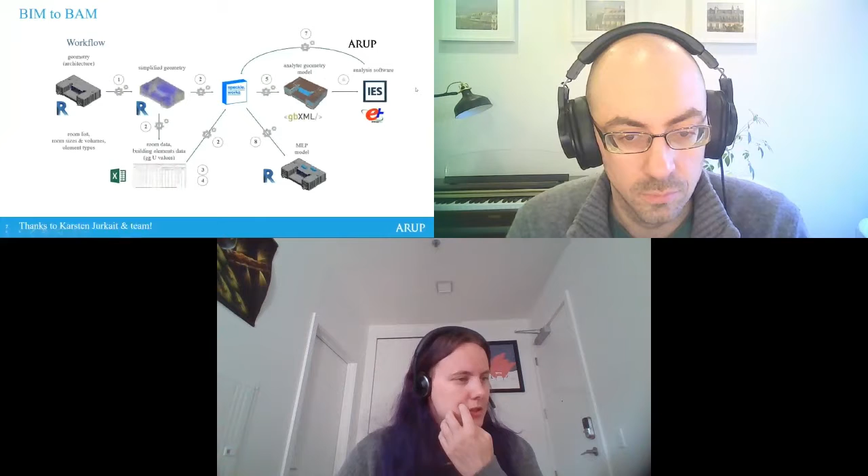Next slide. So one example of a more overarching tool that's been built within Arup using Speckle, dealing specifically with an energy modeling and loads modeling workflow, is our BIM to BAM tool. BIM to BAM is BIM to Building Analysis Model. This is a tool that lets us look at basic geometry and architecture within Revit, simplify it, and create spaces that we use for our load models.

And then we're able to use Speckle to merge those spaces with the design data, like occupancy, watts per square foot for lighting and equipment, or per square meter if you're not in the US, to very easily create a GBXML file with all of our initial loads assumptions per space type already filled out.

That can be passed back to Speckle and brought into any load modeling software we use within Arup. So instead of spending days figuring out how to simplify a model, going back and forth along that linear process, we can get a load model up and running in a matter of hours, which on large complex projects is a huge time saver and makes our workflows quite a lot easier.

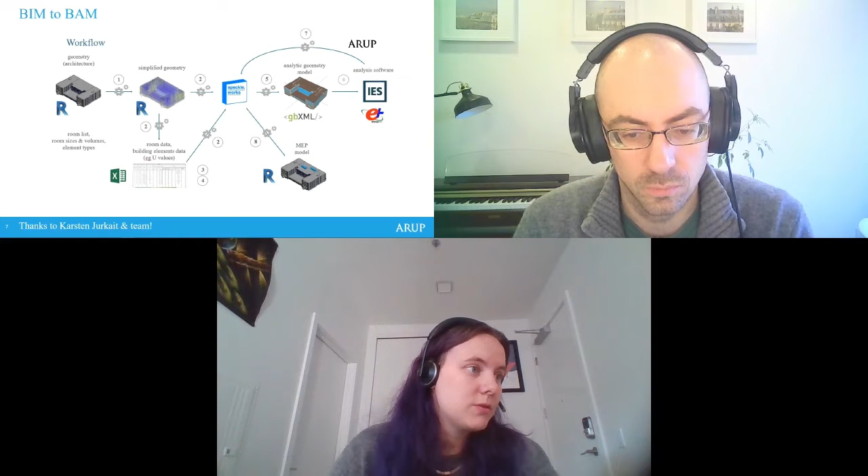Fantastic. Thanks, Lydia. And if any of you have questions about projects, we're going to go pretty fast through all of these, so please, we'll come back to them at the end, don't worry.

So this project is an example of a bunch of existing buildings that needed retrofit, and we were able to use Speckle because it was a really efficient way to have one person build the BIM model and the structural analysis model. Revit has a capability to build an analytical model, and with Speckle we were able to ship that directly into our analysis. Thibault here was basically able to save a huge amount of time.

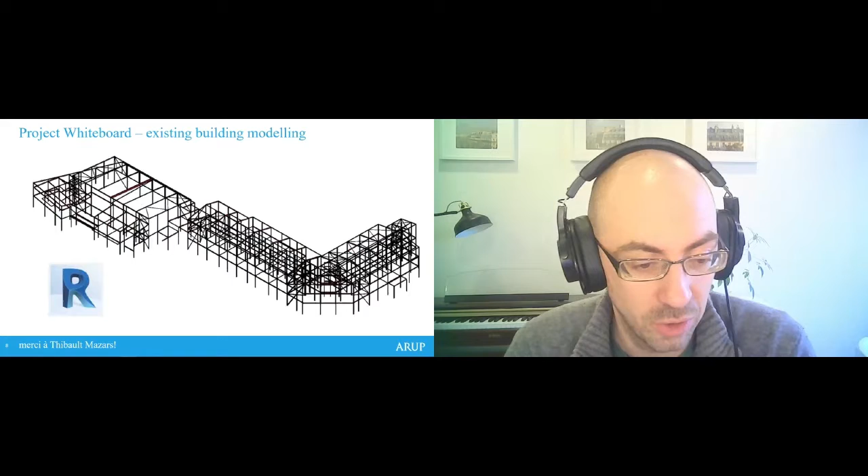And because this was a project that the team in Canada was working on, but the projects were in Europe, the fact that it was in Speckle also helped with coordination and communication across many time zones. This is a project in Wales, Dyfi Crossing, and again Speckle was used to ensure that the analysis model was in sync with the BIM model.

Moving right along, unfortunately I can't show you pictures of this project, but it's a big warehouse project, and we're building a number of these around the world for a single client. This is a really cool example of how you don't have to go whole hog on Speckle to get the benefits.

In this case, the team starts with setting out geometry in Rhino. They just lay out basic geometry of the warehouse in Rhino, and they have a Grasshopper script that builds up the structural analytical model from that. From there, they send it off to structural analysis. GSA is a structural analysis package via Geometry Gym.

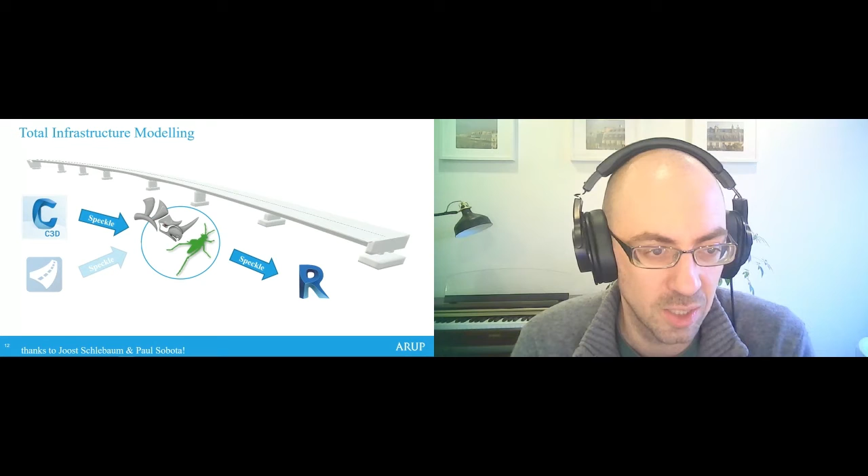Our infrastructure teams - I talked earlier about how processes and standards are important. So our infrastructure team in Europe has set up a process for using Speckle called total infrastructure modeling. And this is a bridge. This is not a demo bridge, this is an actual bridge that our teams are designing.

They're using Speckle to go from Civil 3D into Rhino. Speaking to Paul here, who gave me these images, he said, I've just started with Speckle 2, and it's really great. We've got a Civil 3D connector directly in there, and I don't need to use Dynamo anymore. Then that goes into doing some work with Rhino and Grasshopper, and from Speckle again they can send it directly to Revit.

One thing I learned getting into this project, if you're working in linear infrastructure on big projects, is that Speckle does a better job than a lot of other software at dealing with large coordinates. So if you're working in Civil 3D or big linear infrastructure, you're very likely modeling tens or hundreds of kilometers away from the origin, and that just passes through Speckle without a blip, without any problem.

That's really cool. And as I mentioned, we'll be releasing Bentley connectors, OpenRoads, OpenRail. What's important to that is that generally speaking, whether you're in a big firm or a small firm, in one office you're all using the same software. But then all of a sudden you get pulled into an enormous project, and you're either working with colleagues in another part of the world, or in a joint venture with somebody else using different software.

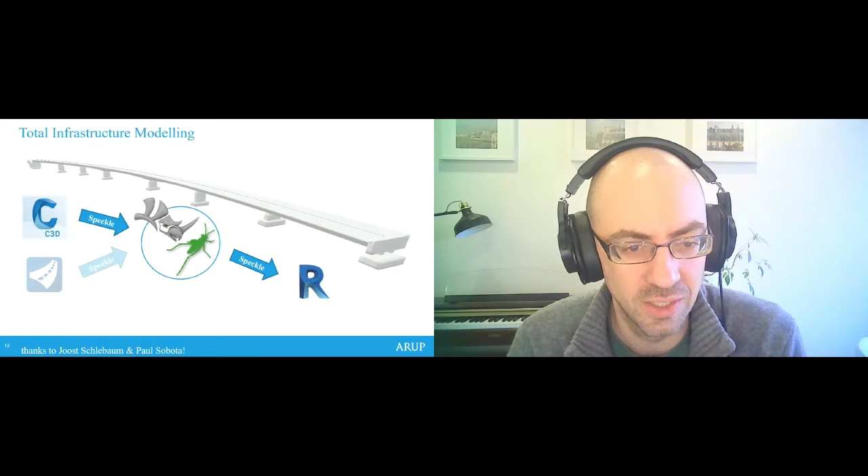What we're likely to see is that when some offices are in Bentley and some are in Civil 3D, we can actually use 80% of the same workflow because we start from that same thing, and as soon as it goes into Speckle, it's in a common format. So for us, that's perhaps a more prosaic bit of collaboration, but just being able to share that information and maintain as much of your workflow as possible is really valuable.

This is a cool project out in Ho Chi Minh City. It's a high-rise tower. You can look up Empire City MU1 and see some pretty cool pictures. That sort of blob three-quarters of the way up the tower is a garden.

It's very beautiful. Again, the team is keeping the analysis and the BIM model in sync by parametrically generating the model in Grasshopper, and then with Speckle, just pushing two streams. They're always in sync because they always come from the same place. So there's never really any fear of going back and finding, I made an update in the structural model, now I analyzed these beams, but they're building different beams, and now we've got a huge problem. Everything stays in sync just because we're able to base everything on the same common setting out.

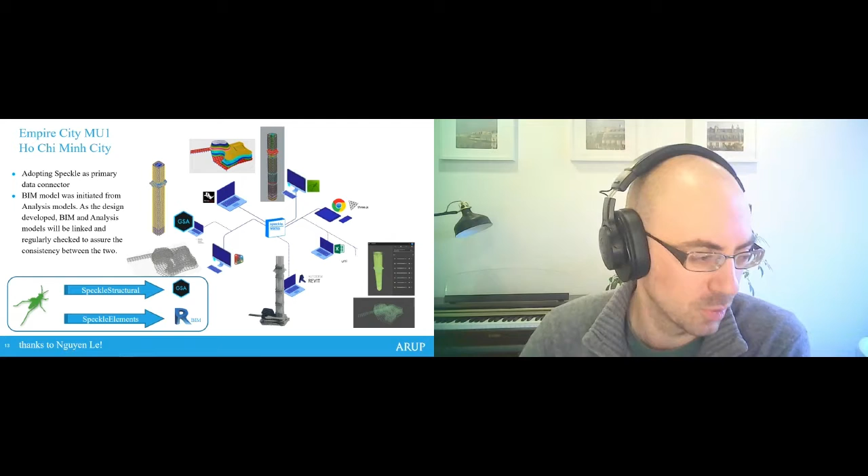So in addition to structural stuff, we also have a move to the cloud, a move to automation - Arup Carbon, which is something we've talked about in the past, and we are talking with Dimitrie and others about open sourcing it and getting this out. It's an ongoing discussion with lots of different things to think about.

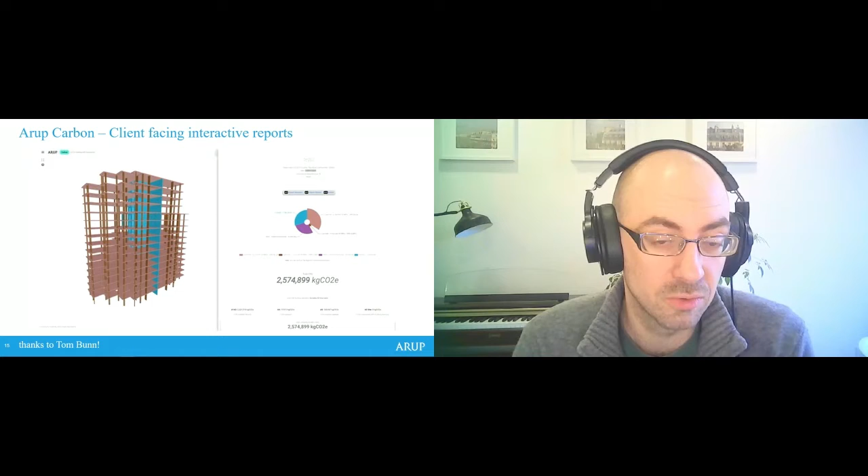But what's interesting for us is that we can build one tool on top of Speckle, and we can push data from anywhere. We can push data from Rhino, from a hand calculation in Excel, from Revit, and get consistent, common carbon reports that we can give to our clients and use for internal audits. So building tools on top of Speckle rather than on top of individual tools really gives us a lot of flexibility.

We've also - and I apologize for not having really cool pictures here - done some work internally within Arup on setting up design workflows in the cloud. What's really cool about Speckle is that we were able to add one little component into Grasshopper that allows a user to say, hey, I want to run a design workflow, and they can authenticate with the Speckle server. What's actually going to happen in the background is a Grasshopper script running on Rhino Compute.

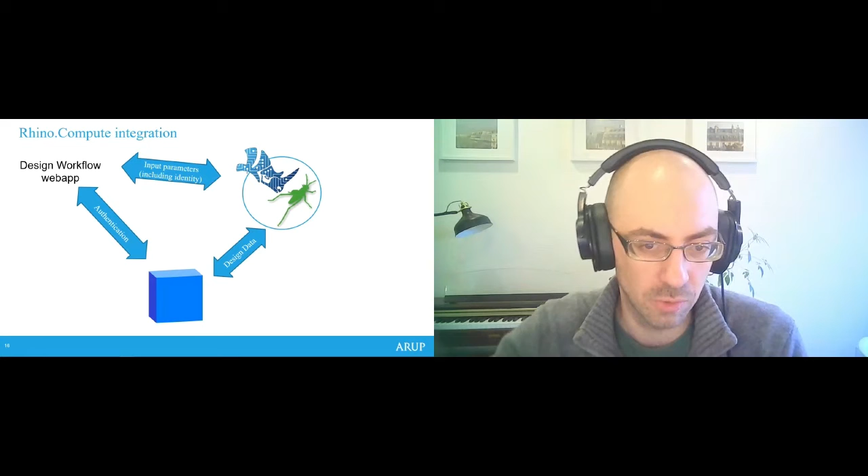That Rhino Compute script, nowhere near your desktop, is going to come and access your Speckle streams, run a bunch of calculations, and then push back. So I said earlier, Speckle sits on the data side - this is the integration with the algorithm side.

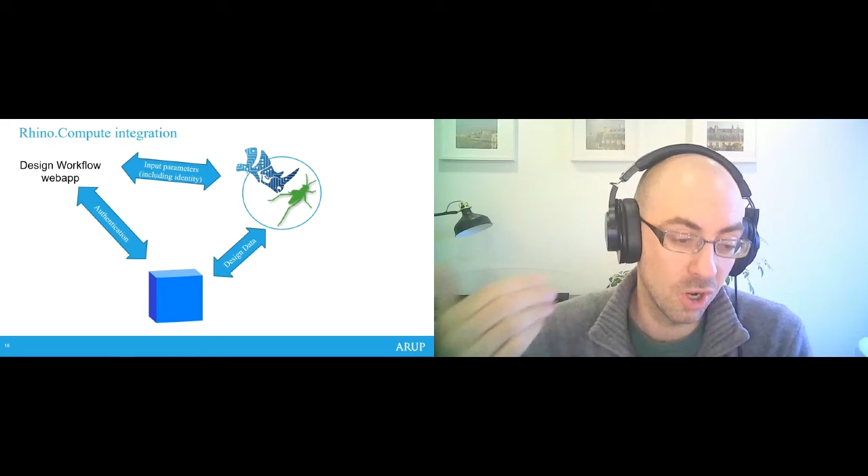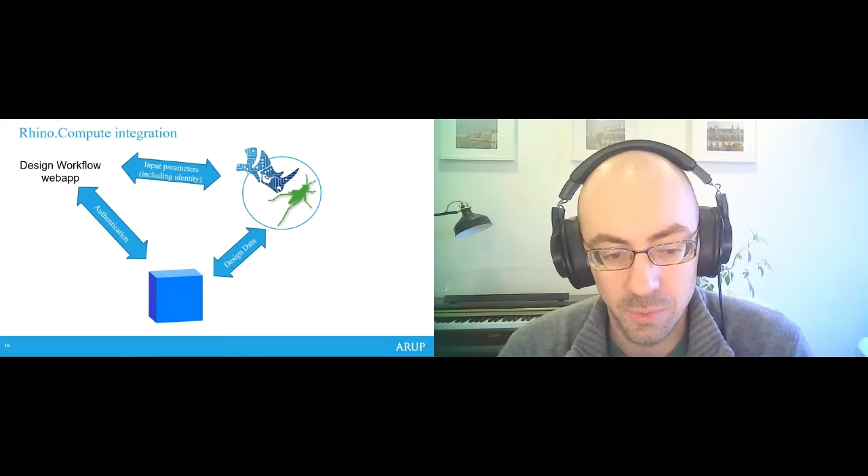With the new webhooks in Speckle 2, we're actually able to have someone log into this platform and say, hey, I want to run this Grasshopper script every time my data updates, and I want the results pushed to this other Speckle stream. So as you push data to Speckle, you're able to have transformed or augmented data, coordinated data, federated data, whatever you set up, on an ongoing basis automatically. Kind of like, for those familiar with the software world, CI/CD - Speckle plays really nicely with that.

And then finally, going back to bridges, this is a specific tool sitting on that platform where we are able to push a bunch of parameters up into the cloud, using just Grasshopper scripts that a team knows how to build. We're able to now put those into the cloud.

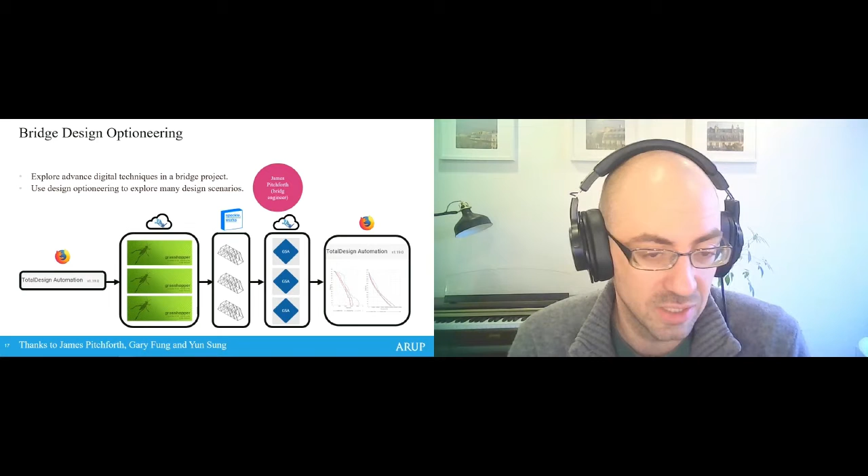So really, going to the next step is getting into these automation levels. We've taken that first step of allowing people to use Speckle to communicate, and once they're doing that, we make it available in the cloud. The same tools they know, instead of running one or two analyses, they're running thousands. So it's really step by step to real transformation.

So I'm just going to pass it over to Fernando now to talk about a number of other case studies, specifically about interdisciplinary coordination. Over to you, Fernando. Thank you, David. Can you hear me?

I'm Fernando from the Building Envelope Design team in Europe. I'm an architect by background. Within building envelope design, it's very common to collaborate with a number of disciplines, as a building envelope has a role to play in lighting, acoustics, daylight, solar performance, energy modeling, structures, and a number of other parameters and performance requirements that need to be fulfilled.

So we're often in the middle of that busy collaboration where data is produced by a number of tools and processes, and often we end up building parallel identities of the world of our project. We run different models in parallel because it's just easier, and that often leads to a huge effort to then merge back the evolution of the different designs from each discipline's perspective. It's not unusual to end up with a few hundred thousand clashes on your BIM models.

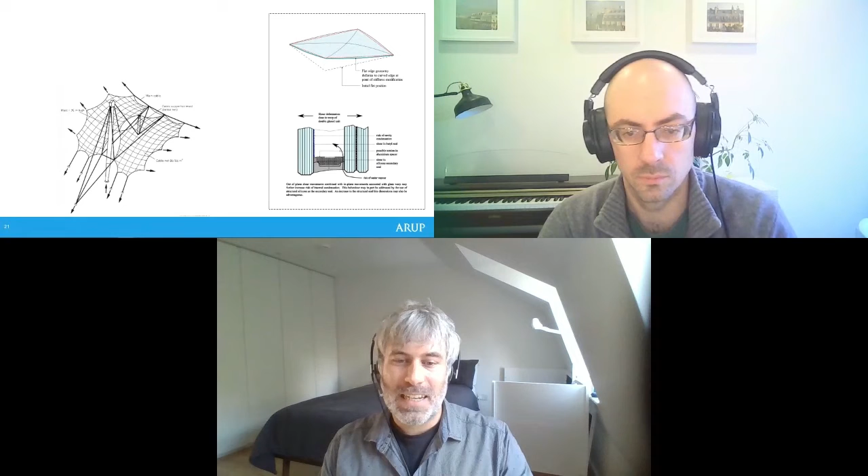Furthermore, into the facades, we also get into detail of understanding how the glass behaves. That movement may lead to warping of the glass, which may compromise and put stresses on the seals of the double glazing, so it's not performing anymore. Also, the opening and closing joints can put too much stress on the glass itself, or make the glass touch into each other and cause breakages.

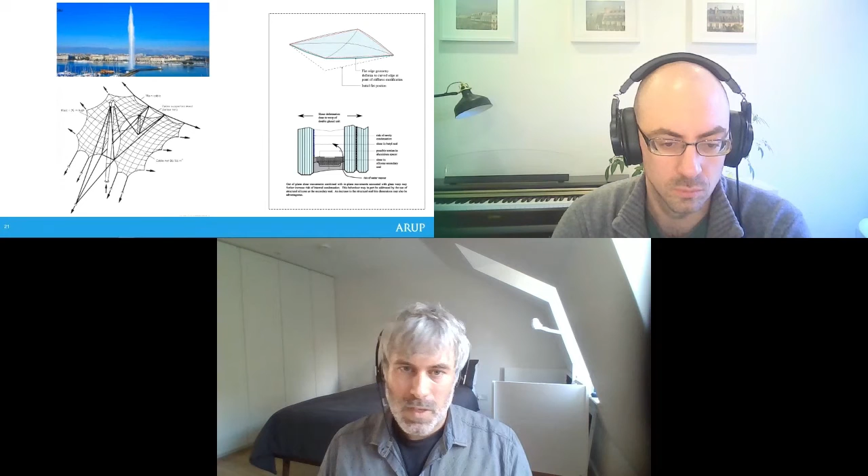And with this sort of context, now imagine that tension structure is also a support for a water feature, a massive choreography with dynamic and changing flows of water on that roof. So, what you may think can possibly go wrong there.

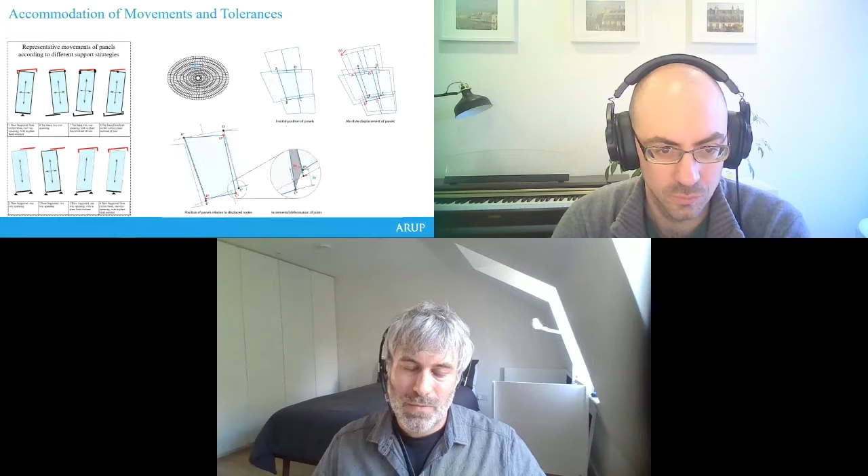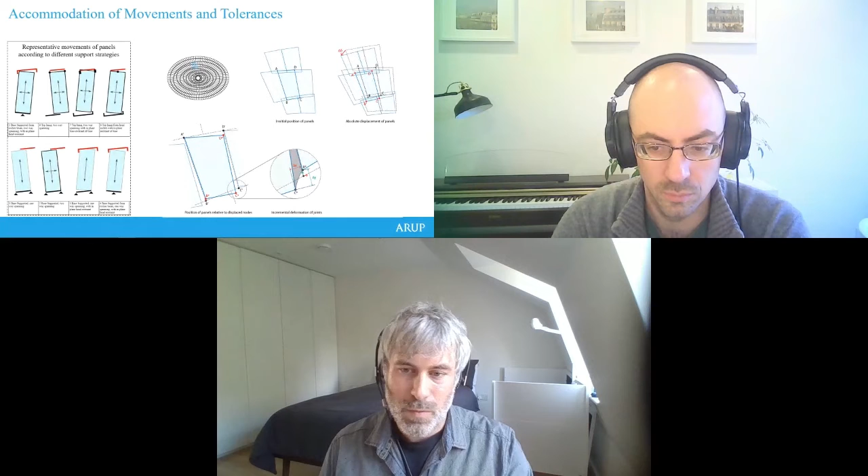So we're understanding the behavior of that to reassure the client that there's not going to be water going through, and any sort of load case and scenario was really important, and having the data at hand to support that design and logic was very important, and making sure that data was coordinated across different parties was key.

Just to add to the before: from our perspective in the facade discipline, it would be studying, understanding, exploring different support strategies and what the implications are from the different movements.

Architecture was streaming a number of iterations of the geometry to both the structures and facades team, so the structural engineer could take that initial panelization to inform and optimize the shape of the tension structure, and also stream into analytical software to understand the deflections, movements, displacements of the nodes in the tension structure. Then the information from both the architects and structures would stream to the facade team.

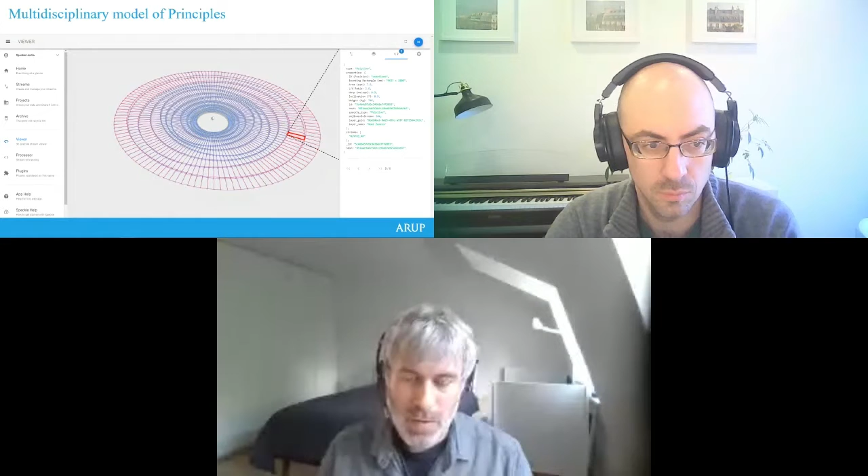So you go to the next one. That's sort of an idea of the model of principles where we started very basic, communicating to each other the minimum amount of information that was needed for other disciplines to build their work on top, and we used those objects also to stream relevant data that was important to understand the behavior of this structure.

And the next one, you can see how we were building this step: from an exploration step where we're building those design iterations and load cases, that we then evaluate to understand behaviors and how movements are accommodated, and finally use to build complexity. So that common model of principles allows each discipline to start adding complexity to the deliverables.

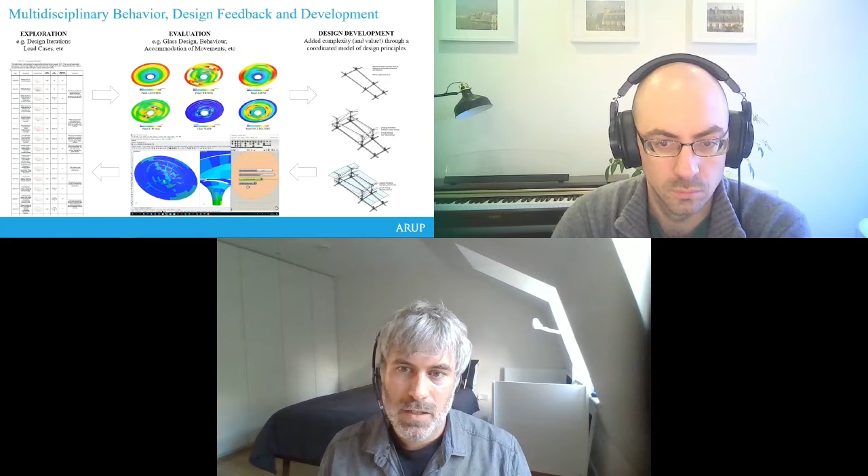In the next slides, you can see another real project. This time it's something in the UK, the HS2 Interchange Station. It was the first railway station in the world to achieve BREEAM Outstanding Achievement at design stage.

And part of that was this ambition to bring together all disciplines to make the right solutions, to fine-tune all the parameters to make sure that, one, we could deliver a station that relies on natural ventilation, with all the parameters that make that possible - solar gains, daylight, airflow and so on - fine-tuned to work with that strategy. But also that we could control or have enough reassurance on the internal conditions to make sure the timber structure would survive over the service life of the building.

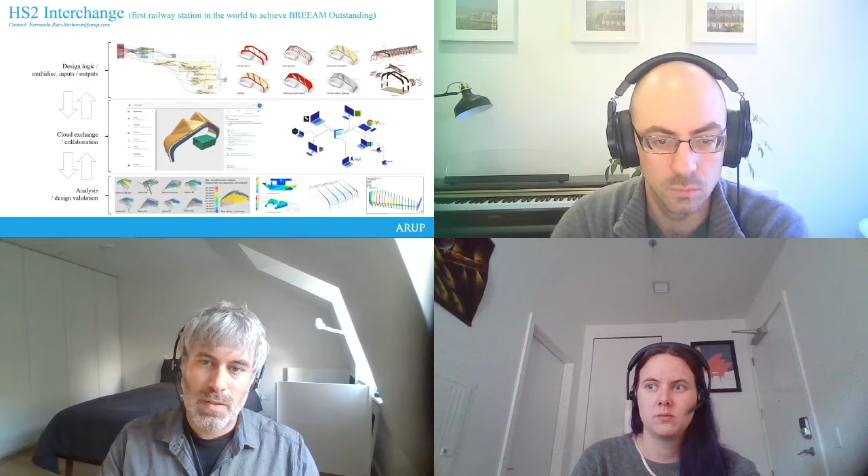So in the next slide, you can see again another workflow where there is a number of tools, scripts and processes to define a design logic, and Speckle was used to allow that collaboration, to stream relevant data to some of our analytical tools - whether it's energy modeling, solar analysis, structural design, CFD - to be able to iterate our solutions faster and come up with a common solution.

That is already coordinated, and thanks to this iterative process and more responsive and dynamic process, we can reach, fine-tune, or refine faster.

This uses digital fabrication, a technique called incremental sheet forming, where a robot little by little pushes the material to shape it, turning a relatively weak metal sheet into a 3D shaped component that, while some areas lose some thickness, the 3D nature brings additional strength. In the next slide you can see a workflow of that.